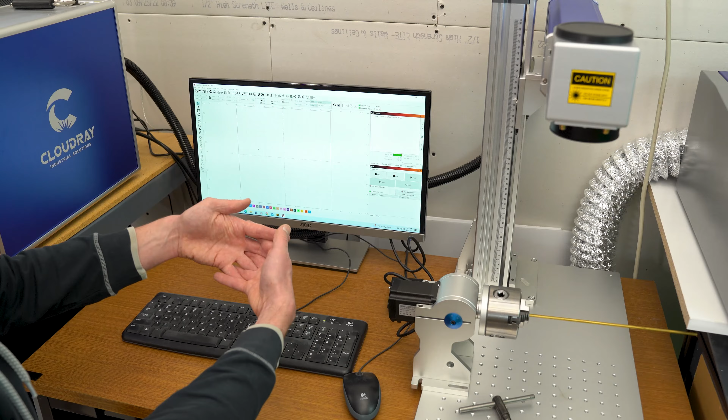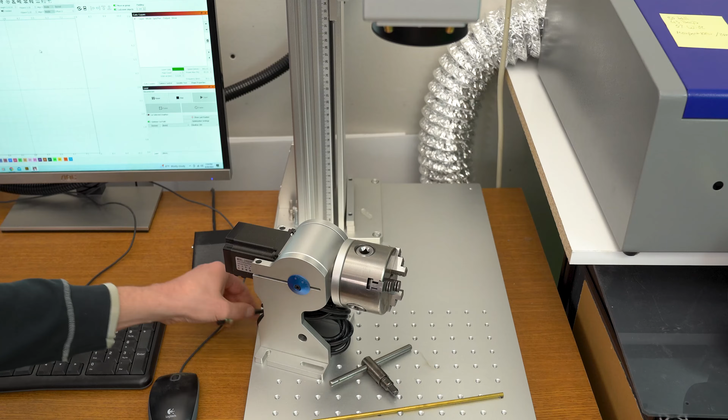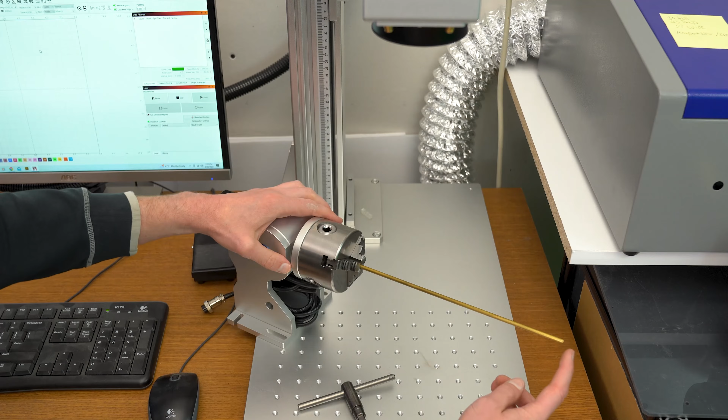The rotary is not bolted down to the work surface and the power cable to the motor is not plugged in. The very first thing that I want to do is take this metal rod and install that in the chuck. Once I have that in there, I want to just spin the chuck with my hand, and I'm looking at the very tip of the rod to make sure that it is perfectly straight.

Now, what I'm doing with this metal rod is when we go into the LightBurn software, I'm going to draw a line, and then I'm going to frame that line out so that the laser head draws that red beam, and we need to use that red line to align the rotary unit up to the laser head.

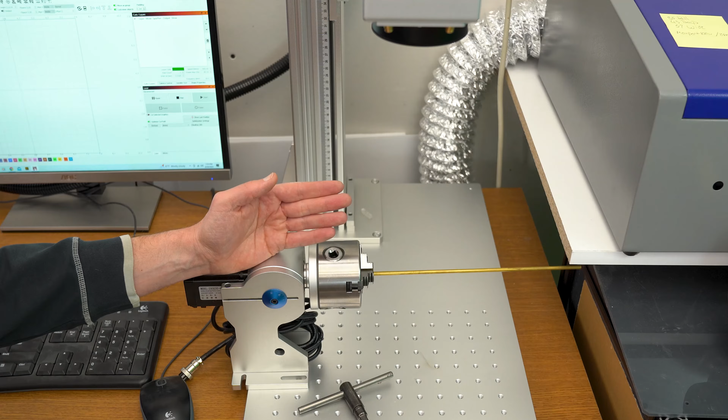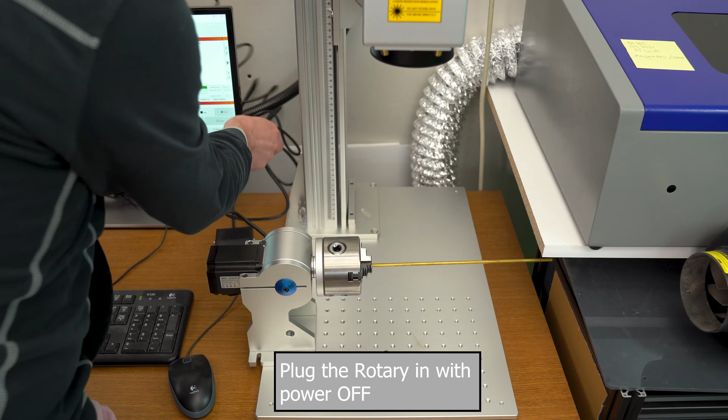And that is because all of these holes on this plate down here, when I have this bolted down, might not be directly in the center line. And when I'm in the software placing my graphics, I want to make sure that I'm placing my graphics on the center line of the chuck. With this all set, I can remove this long power cable from the motor, and I can plug that into the back of the machine.

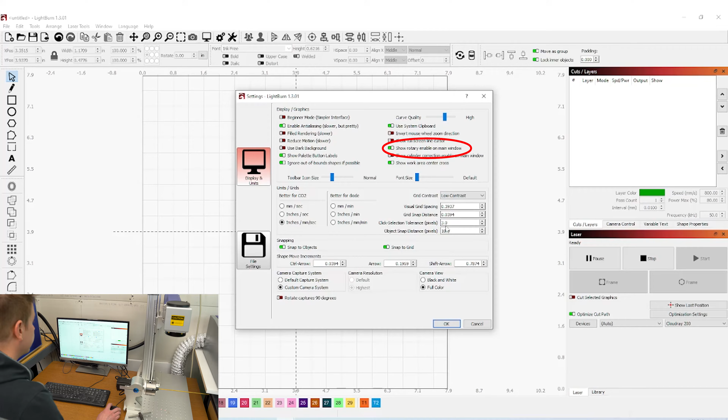Inside LightBurn, I'm now ready to turn power on my machine. And the first thing that I'm going to see in LightBurn is in this area here, I do not see a spot to activate the rotary unit. I'm going to navigate over to Edit, Settings, and there's a little checkbox here, Show Rotary Enable on Main Window. When I click OK, now that shows up. I can enable that now.

Navigating to the top of the screen is the rotary setup button here. When I click on that once, it brings up this submenu. Starting at the top of the screen, I'll go through all the stuff on the screen here that's relevant for us in this video. The rotary type is a chuck type, of course. I have the rotary enabled. Right now, I do not have reverse the rotary direction.

And I have it set up to return to the start point. This is great if you're doing a high production volume of lots of tumblers or engravings for industrial processes. I'm going to skip over split setup and head over to rotary settings.

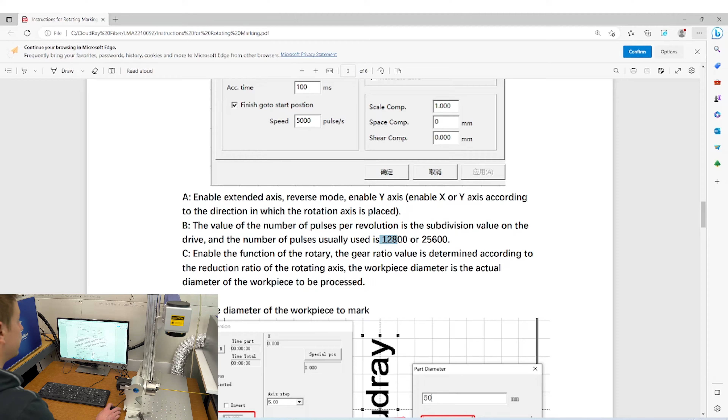The first line here is steps per rotation, and that is referring to steps per rotation for this specific motor on this rotary unit. I found out what my step count was by referencing the manual that came with my Cloudray machine. Essentially, this phrase here, pulses per revolution, is what they're talking about. They mean the same thing. And they state that that number is usually 12,800 or 25,600. In my case, it happened to be 12,800, and that is what I typed in here.

The next line is the object diameter, and I have a setting in there right now of 0.875 inches, and that's the diameter of this test pipe that I have. I used my dial calipers, and that's exactly what I measured. And we'll need to enter this number in every time we change the object diameter. It will automatically calculate the circumference. We don't need to do anything with that at all.

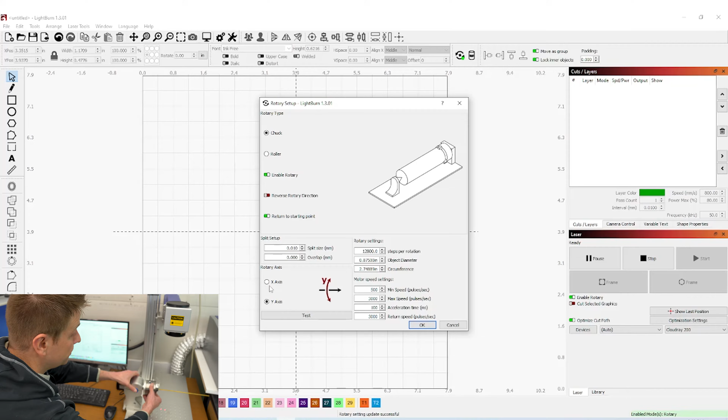Moving on to motor speed settings, all of these numbers were defaulted by LightBurn. I didn't adjust any of these numbers at all. Now that I've covered all of this, we'll go over to rotary axis, and this has to do with what direction we're having the rotary axis of this unit facing, and I have it facing for the y-axis. If I had this unit turned towards us, facing in either direction, that would be the x-axis. But for me, I prefer to have it set up on this axis.

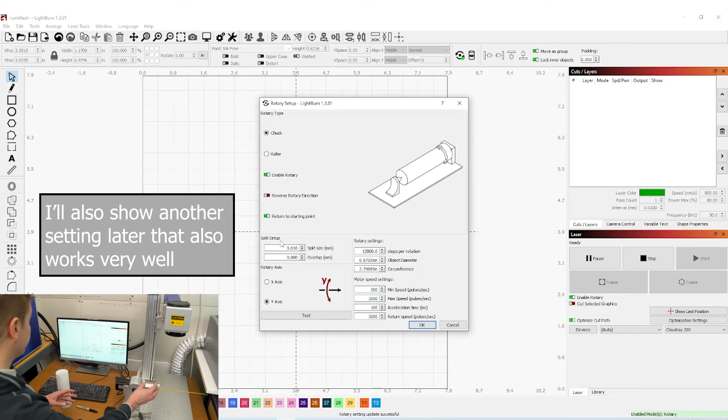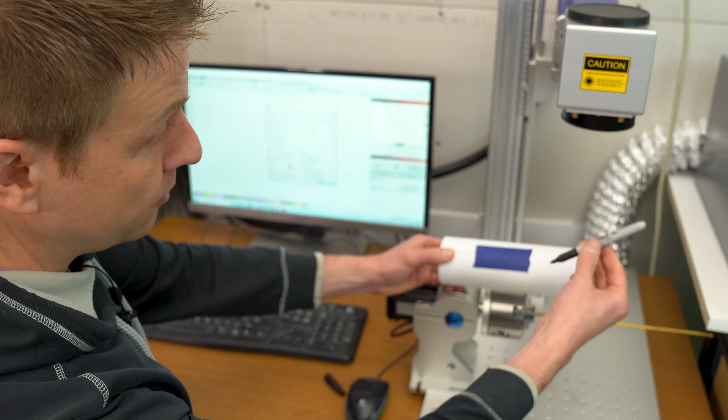Split setup. This is something that I set up once, and I've been able to leave that setting the same regardless of the diameter of the work material that I have chucked up in the rotary attachment. And for that, I'm going to use this prop. I have a piece of white paper wrapped around a spray paint can. And for the laser, this black marker is going to simulate the laser. Now, currently in the LightBurn software, I have a split size of something like 0.01 millimeters.

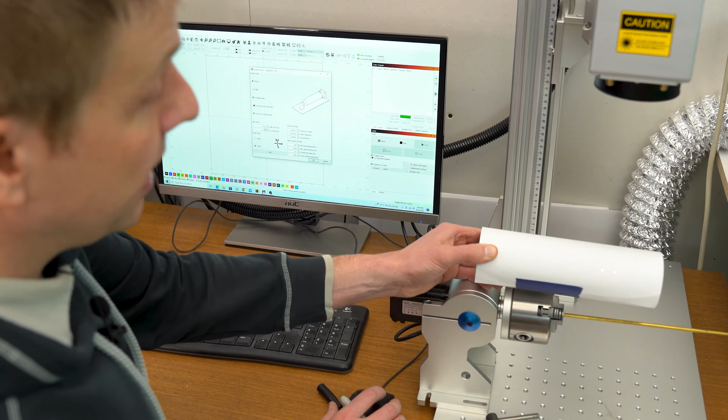And that 0.01 millimeters is essentially what distance it's going to engrave across the face before it stops laser engraving, and it tells the rotary unit to index forward. The laser is then going to laser engrave a little bit more, stop, and then the rotary unit's going to index some more. And it's going to keep doing this.

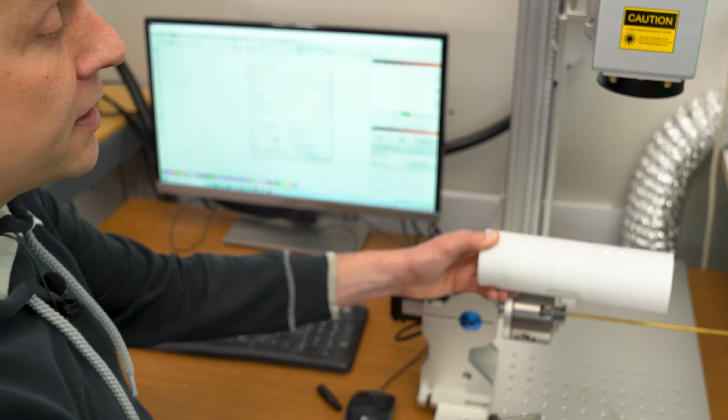Now, one of the things that can happen if you have the numbers really far off in here, and you might want to play with them depending on your setup, is that you can engrave, and if it indexes too far, it will leave a gap in there. And when it indexes again, you'll have all of these little gaps in there. And conversely, if you've got a setting in there too far off, you'll engrave, it'll index forward, and it will overlap too much before indexing onto the next one. So something that was supposed to be, say, this distance here got shrunk down to something much, much smaller.

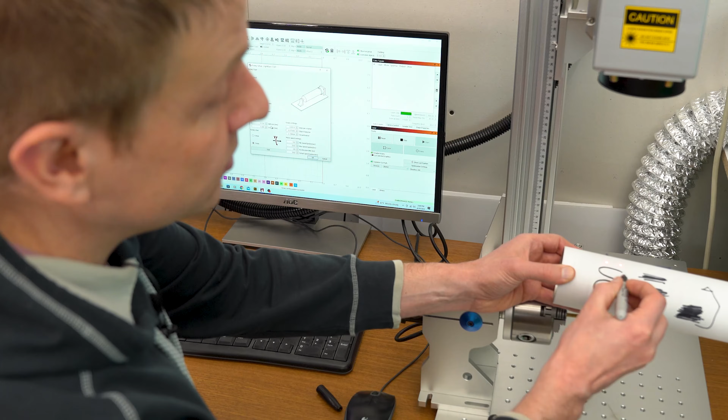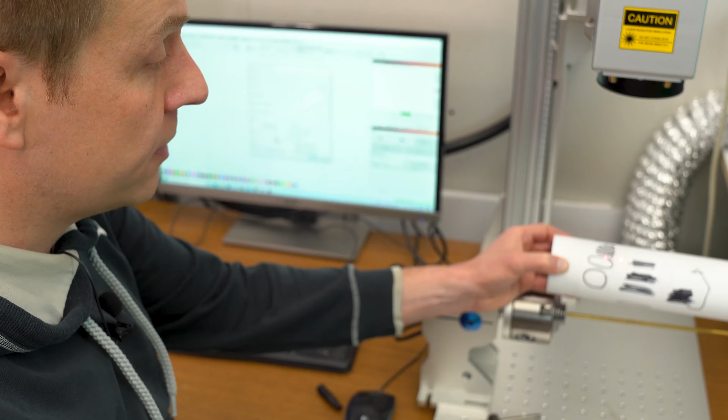So if you're drawing an oval or a circle in a perfect setup, you'd have that perfect circle. If you have this split size setup incorrect, you might end up with an oval that's scrunched down or one that is segmented and really stretched out. Hopefully that makes sense for you. Hopefully you can plug in the numbers that I'm using and they're going to work perfectly for you. I have everything in the setup here. Looks good. I'm going to hit OK.

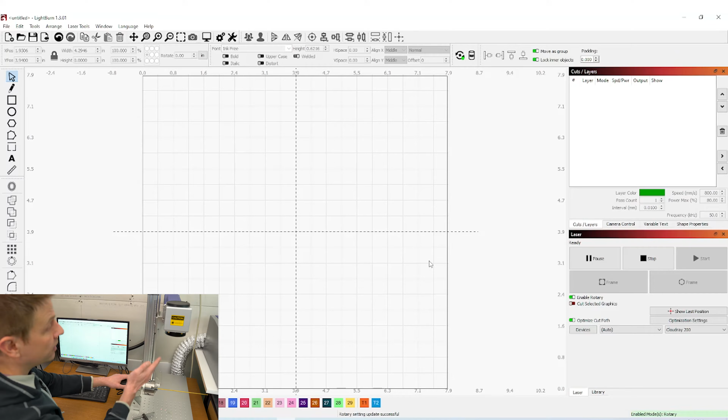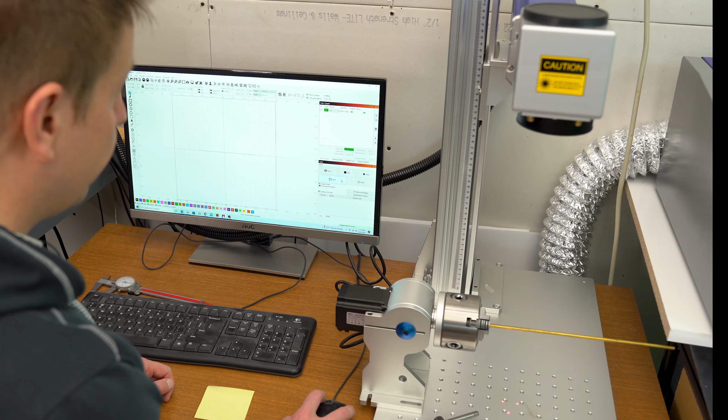I have the setup complete in LightBurn software, and it's now time to align the rotary unit up to the laser head and get everything bolted down. And in LightBurn, I'm going to draw a line on this axis. I'm ready to hit the frame button, and I have this line down here. I'll use this yellow post-it so it shows up better.

I've got that line dancing across, and I use that line so that I can just push my rotary unit around on the table until it's somewhat close to where it needs to be. And what I'm doing is picking a spot where I have this framed out line on this metal shaft in the chuck, and then I'm also looking down on this work surface at the mounting pad here, and I'm going to find the closest spot where I have a couple of mounting holes to firmly attach the rotary unit down to this work base.

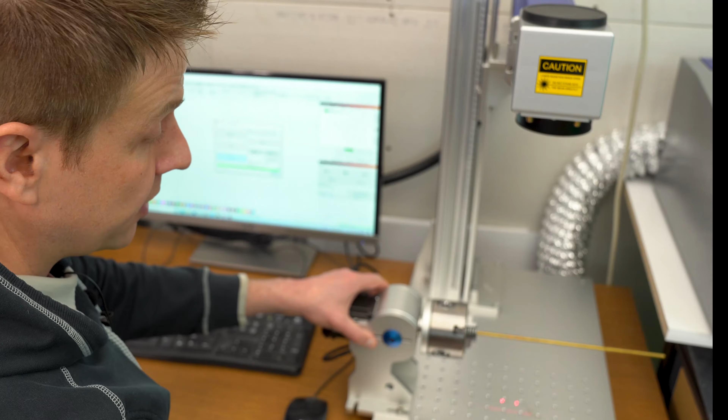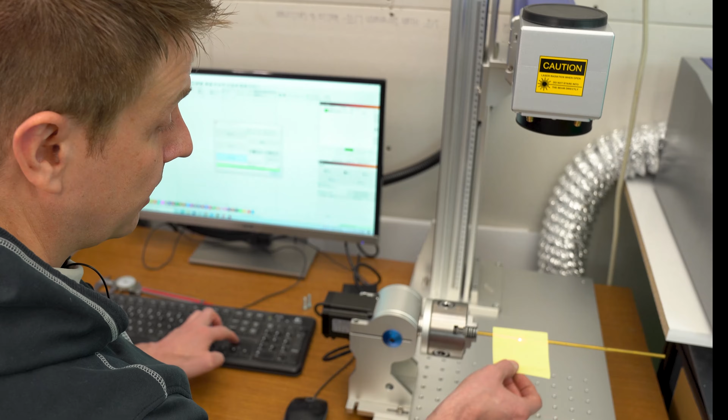I don't have the bolts fully tightened down. I still want to be able to pivot this rotary unit, and I'm going to use that post-it note again, and I can see that I need to move this red line up a little bit higher. So to do that, I'm going to press and hold the shift key and hit the up key, and that's going to move that dancing red line up in 1 millimeter increments.

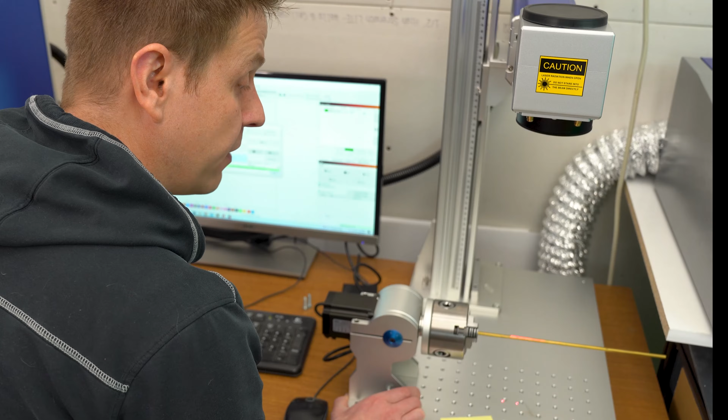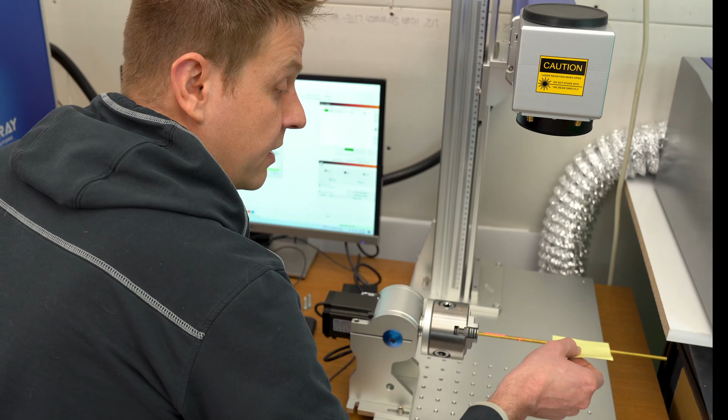Now it's just a matter of pivoting the rotary attachment so that it's perfectly in line on this shaft, and I went a little bit too far, so I have that set up. I'm exactly hitting the center of the shaft. This all looks good. I can turn off the framing tool, and when I zoom in LightBurn, we can see that that line that we drew that was exactly on this dash crosshair for the center of the work area, that has moved up just a little bit.

Now I'm going to highlight that line again, and I'm going to put that on a tool layer. That way we don't mark or engrave that when we go to do the project. And this line is our new center line. It's no longer this dashed line down here. It will be the orange line.

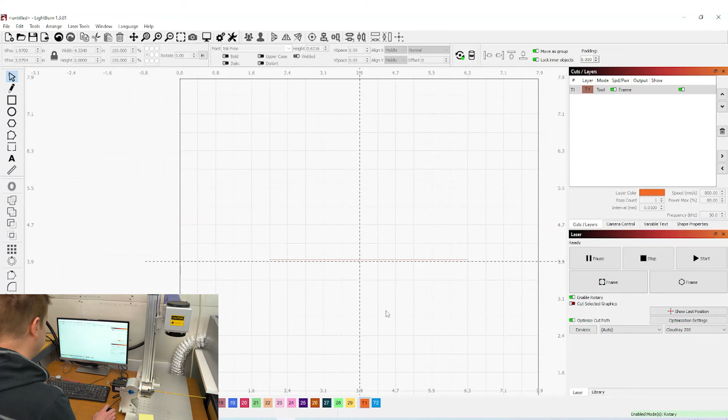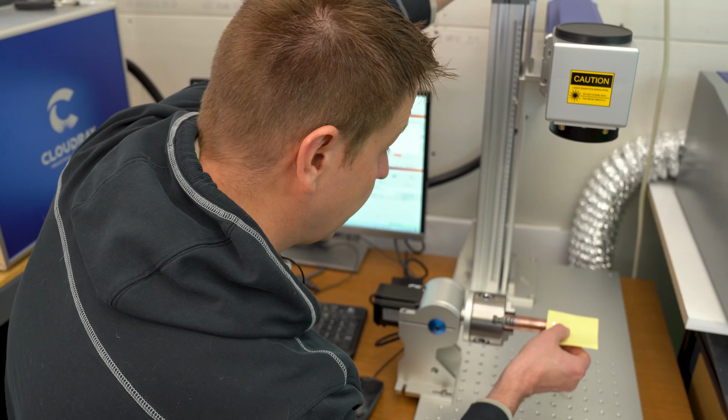I'm all done with this metal rod, and I can remove that from the chuck and place that off to the side, and I'm ready to place in this test copper piece that I have. And I'm going to check the focus here on my machine, and that looks good. And the first thing that I can do is I'm just going to type in 1, 2, 3. And let me change that font style to, how about this one? A little bit more of a brick pattern.

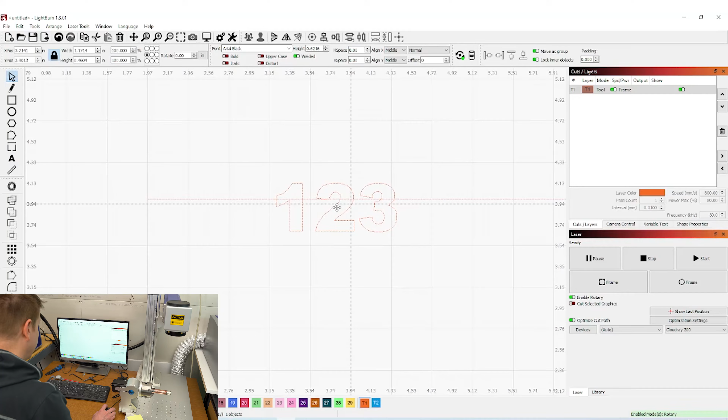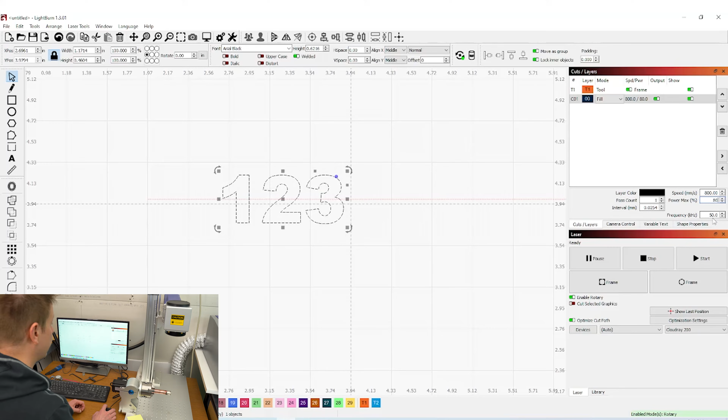And now I'm going to move this up here, and now I've got that 1, 2, 3 on the center line of what we just moved the rotary unit to. I'm going to put that on this layer. I have it set to fill. I've got a speed of 800 millimeters per second, maximum power of 65%. Let me turn that up to 80%. Frequency is down at 50 kHz. My line interval I'm going to set at 0.01 millimeters.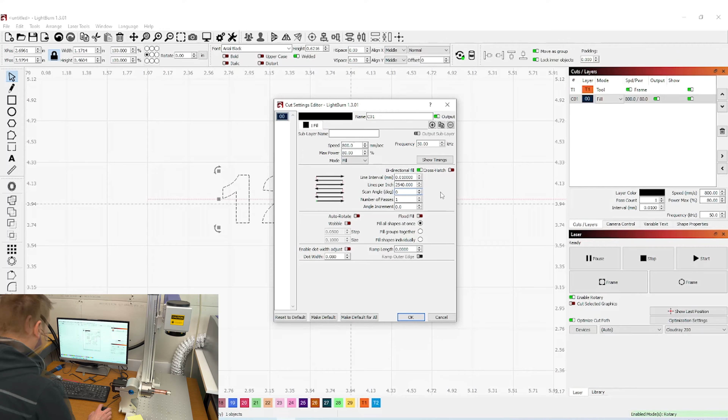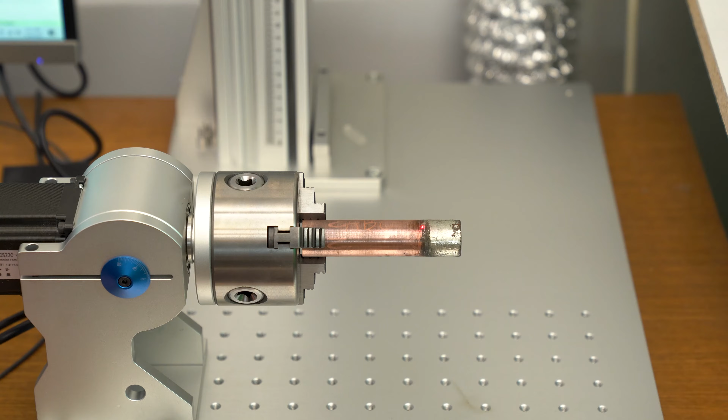If I double click on that fill layer, I don't need the crosshatch on, and I'm going to put the scan angle at 0. We always want to do the engraving scanning in line with the object. This all looks good. And this is an open frame machine, so I will have my safety glasses on. And I'm ready to hit the frame button. And I can see that I'm engraving in a nice spot. And for those of you concerned if I'm hitting this area over here where there's solder, this is silver solder for water pipes that does not contain any lead in it.

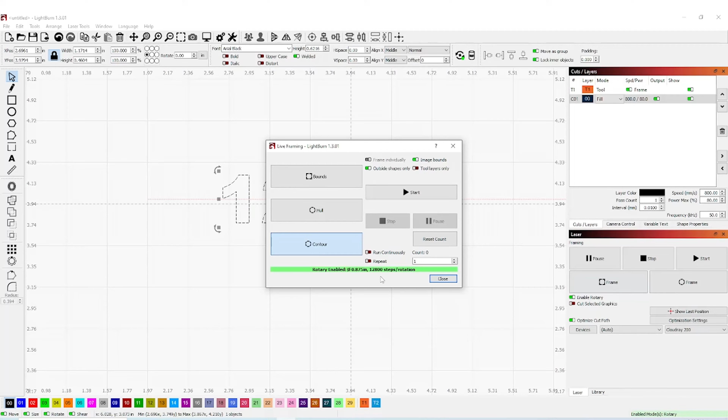When I hit the frame button, this sub window comes up. We're used to seeing this. But with the fiber machine, I get this green bar across the bottom, and this is a reminder that the rotary is enabled, and I manually entered in this diameter of 0.875 inches, and it also tells me the step count of the motor that, again, I told the software what to use. This all looks good, and I'm ready to hit the start button. And that brings up this other menu, and when I hit this start button, it will start the engraving.

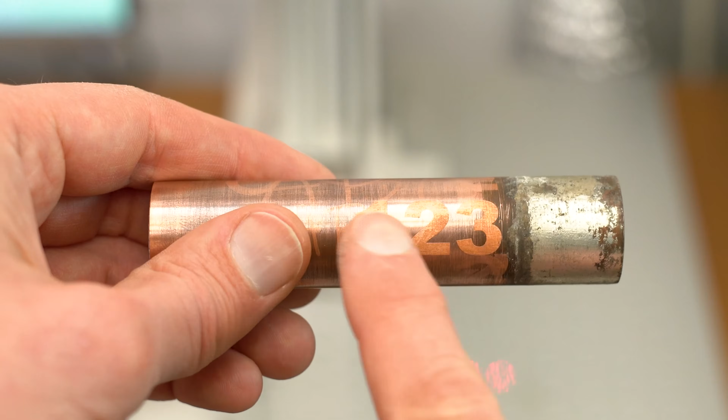That didn't take very long at all. I'll remove this from the chuck and we will take a closer look. Here's a close-up of that test engraving. Everything looks good. It came out in the correct orientation. I don't need to mirror the output.

And the height of this looks good. The engraving didn't overlap where it scrunched down the numbers. And there's also not lines of gaps in between, so everything looked good.

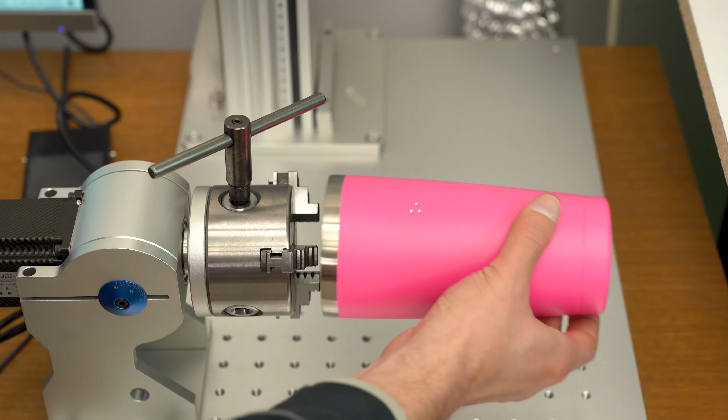Before I place the cup into the chuck, I want to take a measurement of the diameter of the cup. And I don't want to measure up at the very top of the cup because I can see that this cup has a slight taper to it. I want to measure the diameter of where I'm going to be doing the engraving. Now that I've got that measurement, I can place the cup into the chuck and secure it in place.

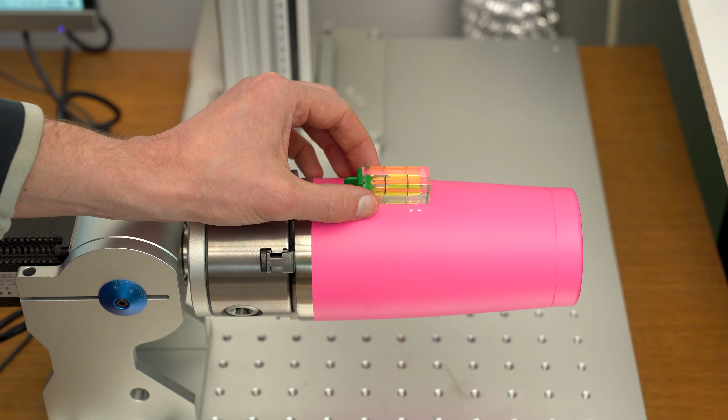At this time, I'm also going to check the level of the cup in the area that I'm going to be doing the engraving, and I can see that I'm way out of level. So I'm going to make the adjustments to the rotary. It does pivot off of this point back here. And that looks perfect. With the level set, I'm now ready to set the focus, or more accurately, the defocus.

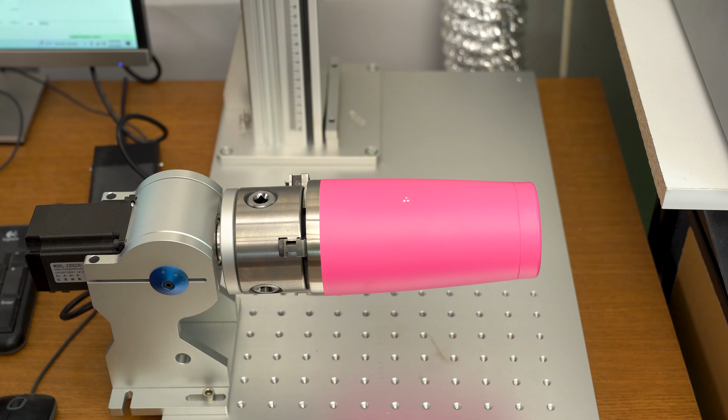When engraving these stainless steel tumblers that are coated, I find that if I set the focus of the laser head, I'll do that right now. I've got 3 dots converging into one. I'm in perfect focus right now. If I run the profile or the program right now, I stand a good chance that I'll burn all the way through this pink powder coating, but I may also start to mark and discolor the stainless steel underneath.

And it's really hard to find that threshold of getting through the coating of the cup, but not marking the stainless steel underneath. And to do this, I defocus the laser by 5 millimeters. I'm going to move the laser up 5 millimeters. This is going to provide this range where I can easily remove the powder coating, but not touch the stainless steel underneath.

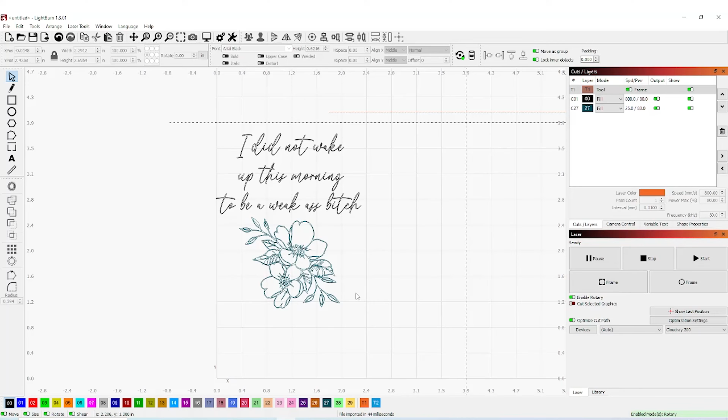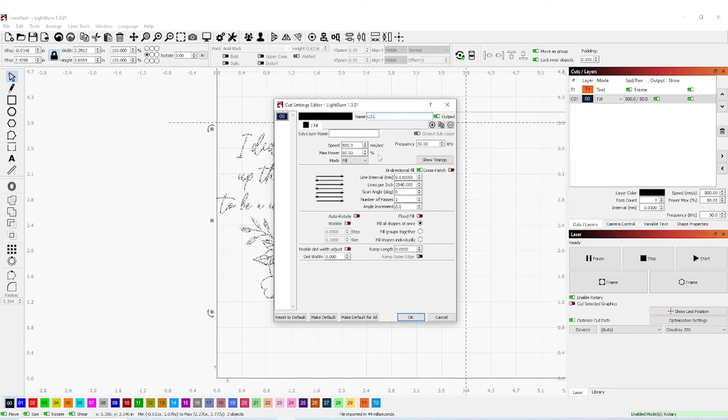In LightBurn, I have the client's graphic loaded in with their motivational quote on there. I'm going to select everything and put it on one layer. And again, I'm going to have that set up with the following. The line interval is still at 0.01. I'm going to have the speed set up at 800 millimeters per second, the frequency at 50 kilohertz. The power I'm going to also have at 50%.

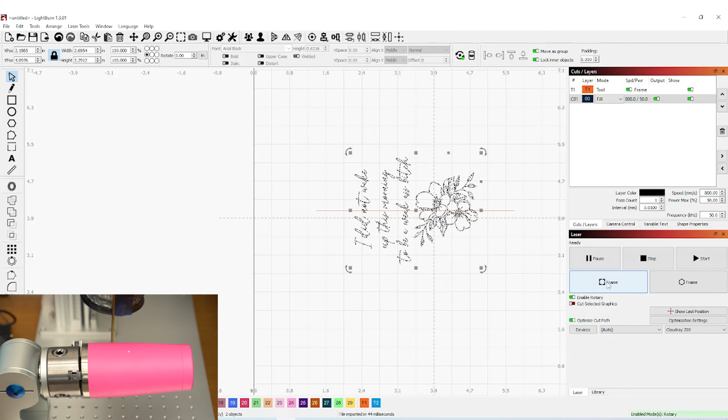Before I frame this out, I want to enter in this new diameter, and I have a diameter of 3.324. I'm going to rotate this graphic so the top of the graphic is the top of the cup. I'm ready to hit the frame. I like the way that that looks, and this too all looks good, and I'm ready to hit the start.

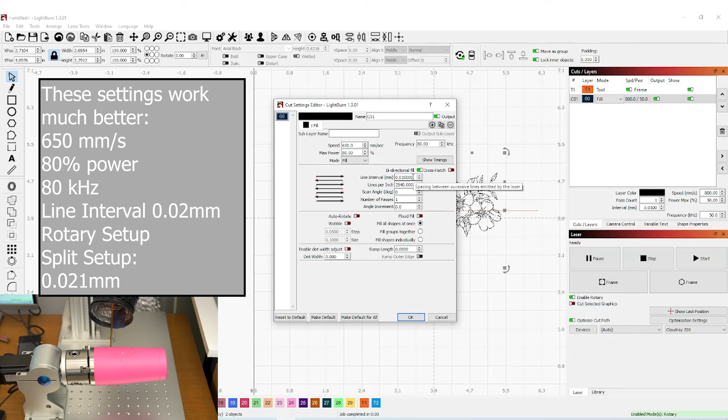And I've got some other settings. I'd like to go back over that one more time. So I'm going to change the speed from 800 to 650. I'm going to change the power level up to 80% and the frequency to 80 kilohertz. I'm going to change my line interval to 0.02. That looks good. I'm going to go into my rotary setup and I'm going to set the split to 0.021. This is all complete and it's ready to remove from the machine.

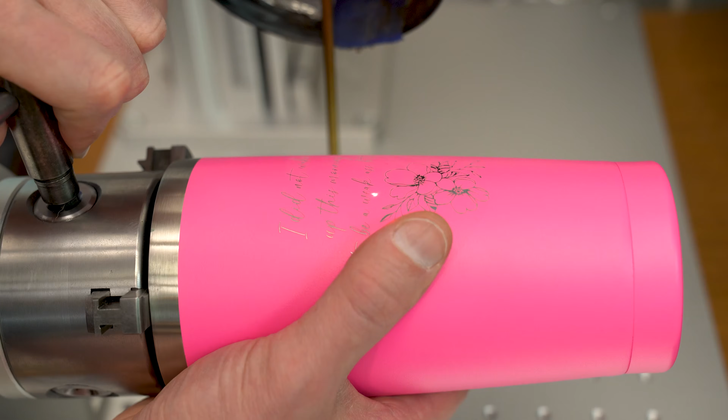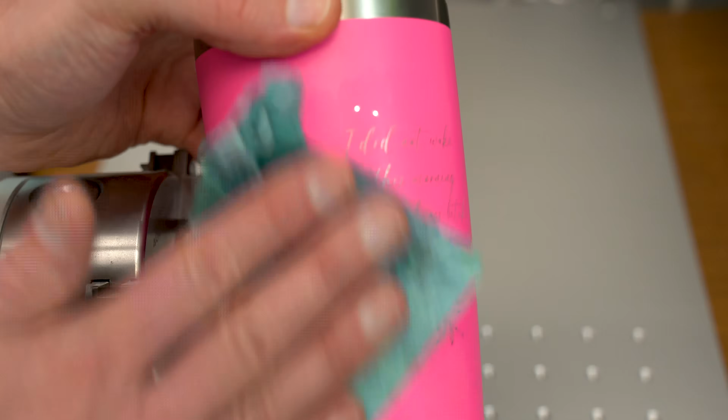The only thing that I need to do is just a quick wipe with some denatured alcohol to remove any of that powder coating residue, and this is ready for the client. Here's a nice close-up again of all the nice clean detail. Again, I got down to the stainless steel without discoloring the stainless steel underneath that powder coating. This cup turned out perfect. The speed was amazing. The detail is phenomenal with the fiber laser machine.